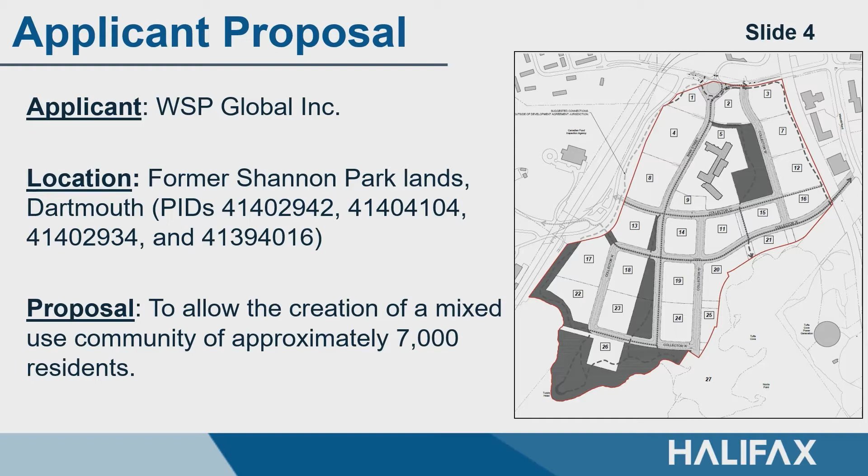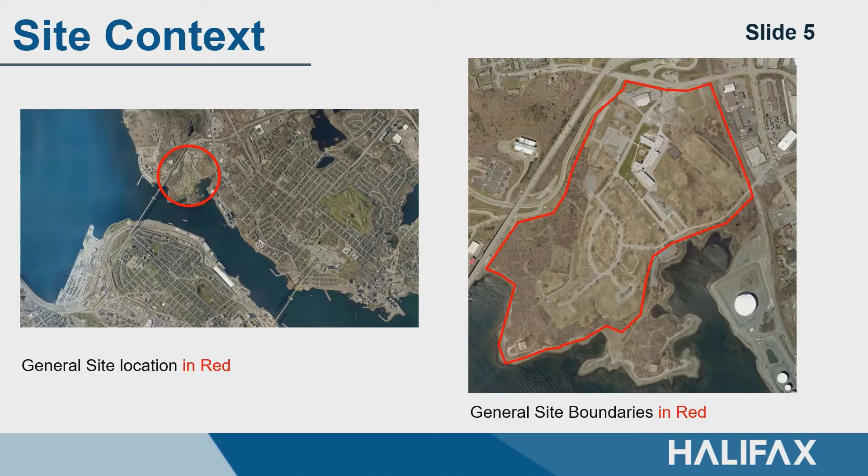So the proposal is to allow for the creation of a mixed-use community of approximately 7,000 residents. The subject site is located in North Dartmouth at the base of the MacKay Bridge. It's located on the coast between the Bedford Institute of Oceanography and Tufts Cove Generating Station. It is a large site, approximately 85 acres in size, and is mostly vacant except for the Shannon Park Elementary School. The site is relatively flat until you come to the coastline where the grades steepen before reaching the harbor.

Canada Lands' proposal includes 26 new city blocks, approximately 7,000 residents housed in a range of building forms, approximately 145,000 square feet of commercial space, approximately 15.5 acres of public park space, and it will include new public streets, municipal services such as water and sewer, and a new transit facility. So this concept plan and other review materials that go into greater detail on the proposal are available on the application webpage, so we encourage you to go view and read those.

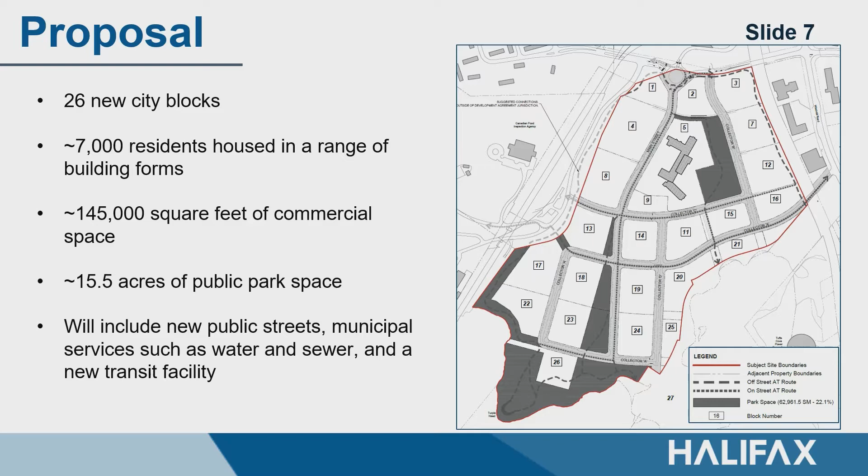When a planning application is made, it's often enabled by planning policies, meaning it was envisioned that development would happen here and rules and guidelines were written to help shape what that development would look like. Planning in HRM consists of 3 levels of documents. It starts with the regional plan, which is very high level. It looks at the entire municipality, all of HRM, and it identifies where population growth should occur and where investment of services like transit, piped water, and sewer should also occur.

The second level of planning policies is the community plan. This plan focuses on a specific geographic area and gets more detailed on what type of development should happen where. Often planning applications which require approval by council are enabled in the community plan. For this application, the applicable community plan is the Regional Centre Secondary Municipal Planning Strategy, or the Centre Plan. The third layer and most detailed planning document is the Land Use Bylaw. This outlines specific zoning and regulations that don't require special approval by council. If you meet the rules, you can go and get a permit without having to engage the public.

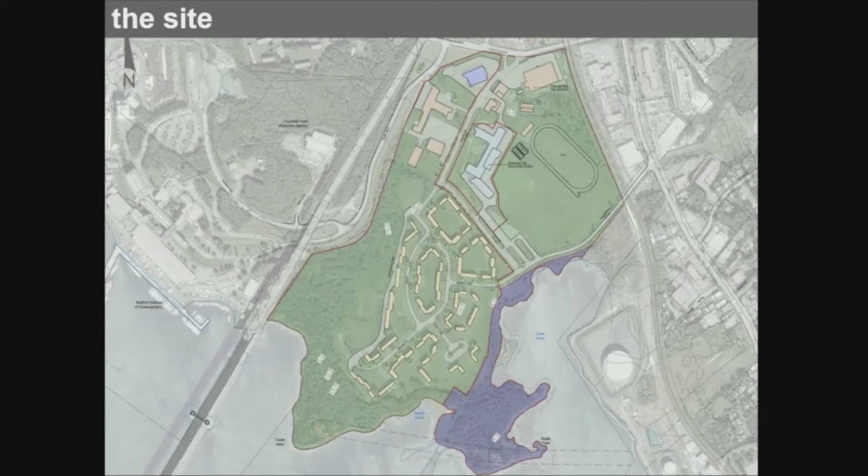This large opportunity site is ready for development and will add a significant amount of housing to the market to meet the needs of HRM's regional centre. Developing Canada Lands' Shannon Park property also provides the opportunity to facilitate Millbrook First Nation in the development of their lands, as servicing and access connections will come through Canada Lands' property.

Canada Lands Company and WSP Canada have previously completed an extensive 18-month community and stakeholder engagement program and developed a preferred development concept for the redevelopment of this regionally significant property. The concept has been shared with the community, municipal and provincial agencies, and North Dartmouth community groups and Millbrook First Nation.

A series of engagement activities were conducted throughout 2015 and 2016. This included a project introductory community meeting, a public ideas fair, 2 industry roundtable sessions, 2 community open houses focusing on concept scenarios and the preferred development concept, and a multitude of individual stakeholder meetings. In total, it is estimated that between 800 and 1,000 individuals were engaged throughout this period.

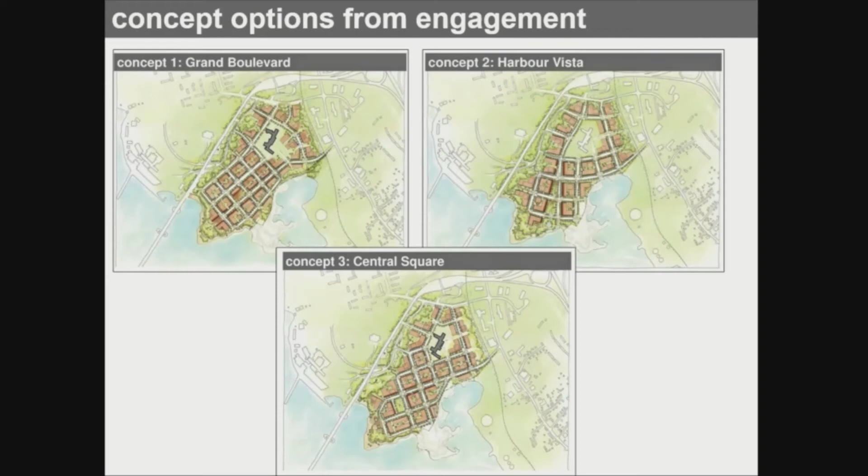Through the feedback received, 6 core urban design principles were identified and a preferred development concept was determined. The principles reflect the public's and HRM's vision to develop a mixed-use, complete urban community at Shannon Park. These are vibrancy, the sentiment people feel when they are part of a place with a unique scale and intensity of design, elements that encourage human interaction and activity.

Public realm, built forms, streetscape treatments, and public spaces providing an attractive and safe environment achieved through a network of pedestrian-focused streets, architectural details, shade, seating, adequate sidewalk widths, and other features. An integrated network of trails and open spaces also contributes to the creation of an attractive and functional public realm.

Mobility, providing streets that are interconnected and offer a compact street grid with space for a variety of mobility options. An additional network of trails and pathways exclusive to pedestrians and cyclists is also desired. Land use and built form. Through integrating a range of land uses and human-scale built form, this mixed-use approach brings the everyday uses of the residents closer to their doorsteps, thus encouraging more sustainable mobility options and a higher quality public realm.

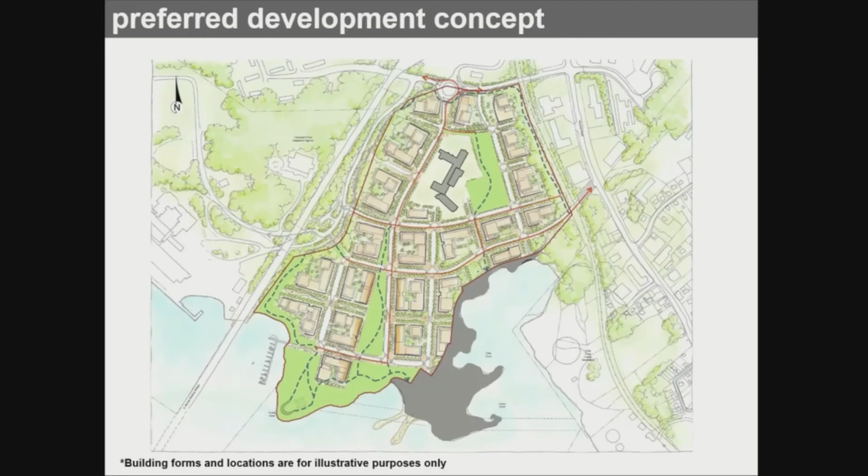The preferred development concept includes a variety of proposed public spaces. These include the square, a large central public space that is in the shape of a wedge that expands towards the waterfront. This is intended to be a major activity hub for Shannon Park and the greater community. The public space is proposed to be lined with small-scale commercial uses and include benches, landscaping, and interactive play features to encourage public activity and interaction.

The waterfront. This space includes the existing Canada 150 trail and look-off, and the area provides the opportunity for additional natural green space, park space opposite the square, and a proposed multi-use trail, further enhancing it as a destination for people to gather, interact, and enjoy the harbor views. While the lands have some areas with substantial grade, the concept recognizes that the waterfront is the most valuable natural asset and designates most of the waterfront space for public use.

The green is east of the Shannon Park School and centrally located. This traditional public park space is proposed to be over 3 acres in area. This space acts as a natural transition between the school and the mixed commercial residential area adjacent to Windmill Road. The proposed public spaces also include small park parcels, which are spaces for community trails, enhancing connectivity throughout the neighborhood.

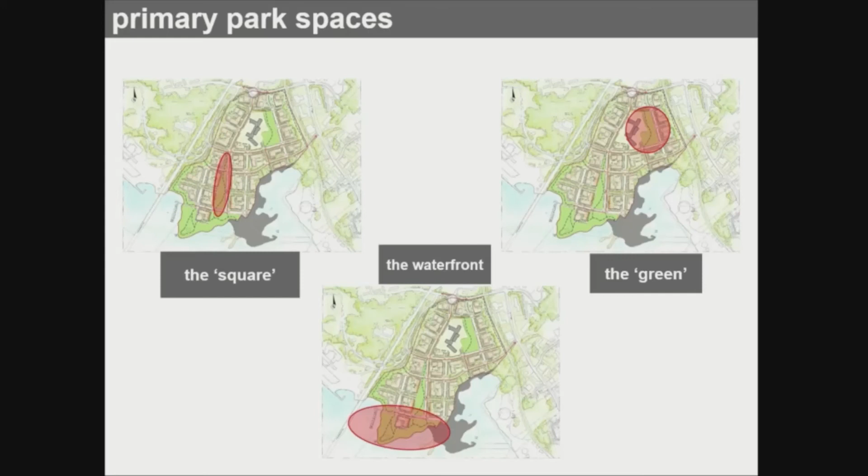The approval and construction of buildings are not being requested under the terms of the development agreement. Rather, buildings will go through a separate site plan approval process by the future builders following the development agreement, which will include public participation as required under the Regional Centre Secondary Municipal Planning Strategy. Following are the built form requirements being considered for inclusion within the development agreement.

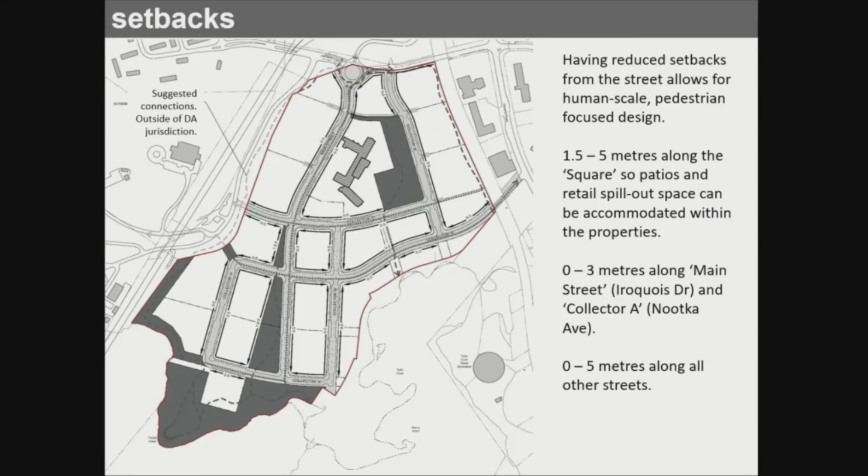Having reduced setbacks from the street allows for human-scale, pedestrian-focused design. It's proposed to have 1.5 to 5 meter setbacks along the square, so patios and retail spill-out space can be accommodated within the properties. 0 to 3 meters setback along the main street, currently Iroquois Drive, and Collector A, currently Nootka Avenue, and 0 to 5 meters proposed along all other streets.

The school property is proposed to be institutional, with a future option to be higher order residential 2 zone. Higher order residential 2 zone abutting the school property. Parks and Community Facility Zone for the park spaces and green spaces, and Center 2 zone on the other parcels, which allows a broad range of residential and commercial uses, such as offices, restaurants, and retail uses.

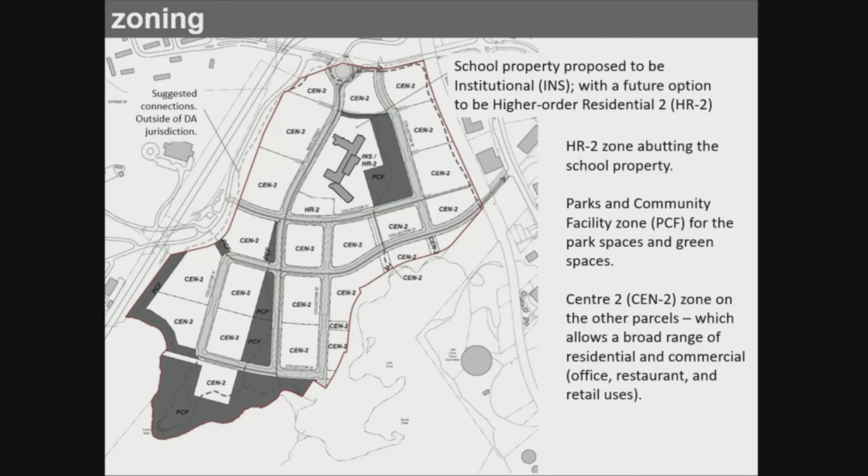Blocks are proposed to range from 3.5 to 9 floor area ratio. Highest floor area ratios near the MacKay Bridge and Princess Margaret Boulevard. Lowest floor area ratios nearest the school, and mid-range floor area ratios throughout the rest of the site and along the square.

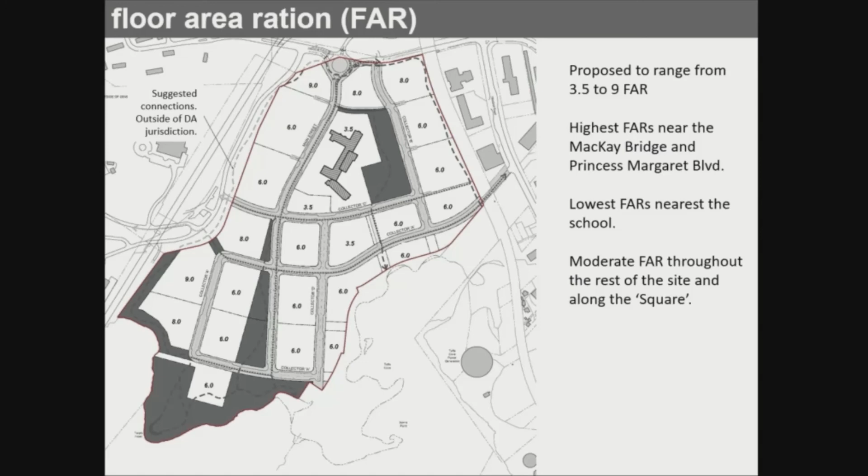The proposed maximum heights to range from 17 meters to 90 meters. Highest near Princess Margaret Boulevard and the MacKay Bridge to buffer the rest of the neighborhood. Lowest near the school, and medium height along the square, which is proposed to be a pedestrian-oriented commercial street, the retail heart of the neighborhood.

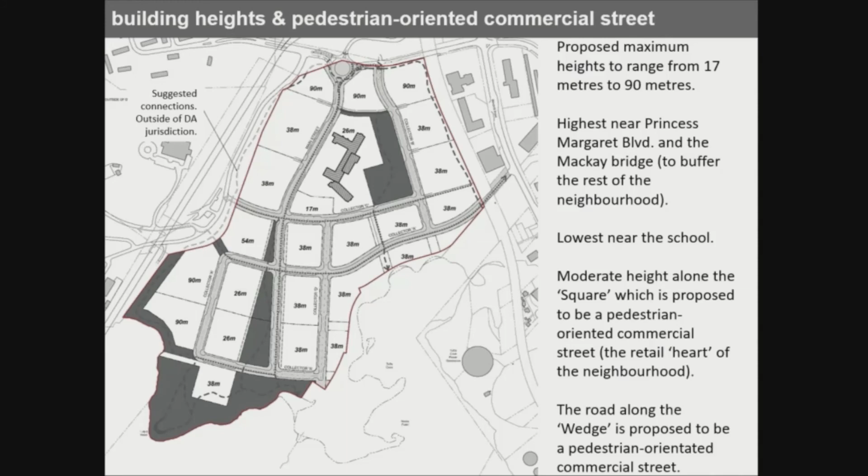The proposed concept for Shannon Park represents a long-term vision for developing a mixed-use urban neighborhood. This vision will be implemented through a phased development approach. Taking into consideration servicing requirements and connections to adjacent neighborhoods and market conditions, it is envisioned that the development will be constructed in 4 phases, each comprising a variety of housing types and community amenities.

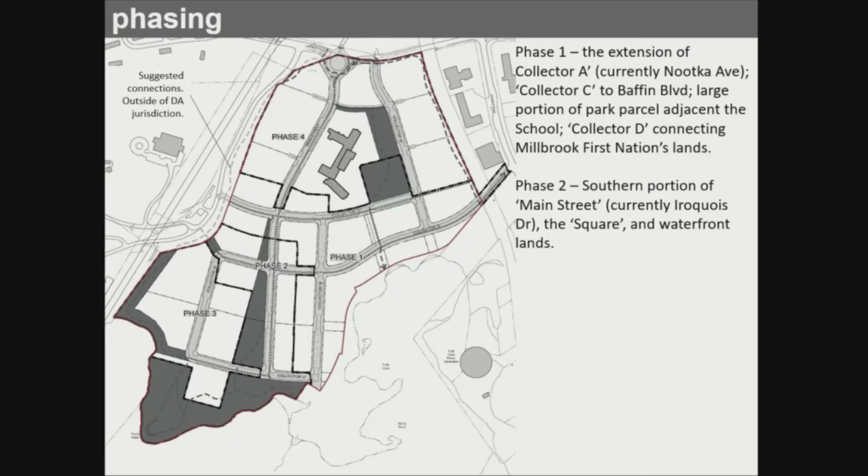Phase 1, the extension of Collector A, currently Nootka Avenue, Collector C to Baffin Boulevard, a large portion of the park parcel adjacent the school, and Collector D connecting Millbrook First Nations lands. Phase 2, the southern portion of Main Street, currently Iroquois Drive, the square, and waterfront lands. Phase 3, the western portion of Collector A, adjacent the MacKay Bridge.

And Phase 4, lands to the north around the school, the connection of Main Street, currently Iroquois Drive, to Princess Margaret Boulevard, with the new roundabout, and lands adjacent the CN Rail corridor near Windmill Road.

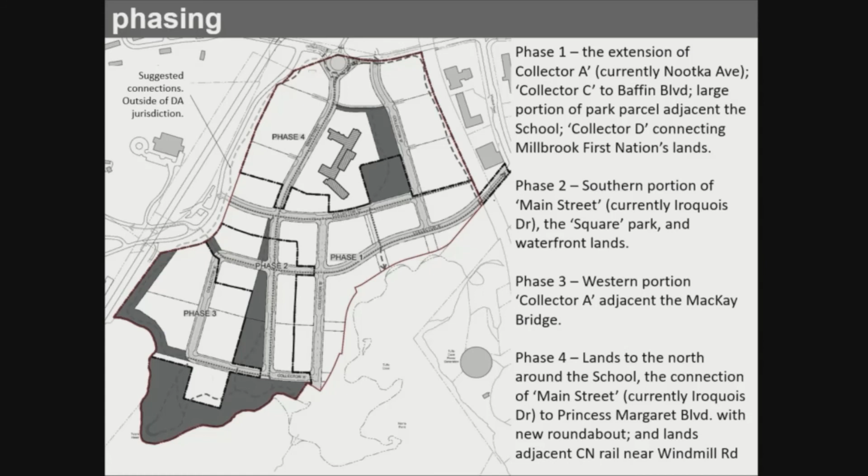While the development agreement will cover broad aspects such as road layout, park and trail locations, zones, and some of the built form requirements such as building setback and heights, Canada Lands will also be undertaking a separate urban design guidelines study. Building on the design requirements within the Regional Centre Land Use Bylaw, this study is intended to produce an urban design and commemoration strategy which will ensure a cohesively designed community constructed with our builder partners.

Following the approval of the development agreement, Canada Lands intends to commence work on detailed engineering, which would be followed by the construction of new streets and services, the subdivision of the property, and the sale of development blocks to industry. Once sales have been completed, our industry building partners will begin their own site planning, approvals, marketing, and construction work.